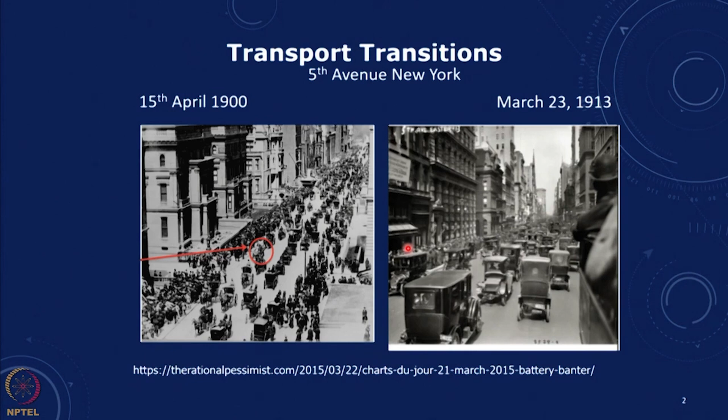The same street in Manhattan a little more than 10 years later, March 1913, and you can see over here most of them are Ford T's. These are the IC engine driven petrol cars, and on one corner you can see there is one horse driven cart. So you can see a rapid transition has happened over a period of a decade. There has been a shift in private transport from horse driven carts to IC engine driven petrol cars, and we now are looking at similar kinds of transitions where we are moving away from petrol and diesel based IC engines, maybe to electric vehicles, biofuel fired vehicles, or hydrogen fuel fired vehicles. So let's look at what the transitions were in the past.

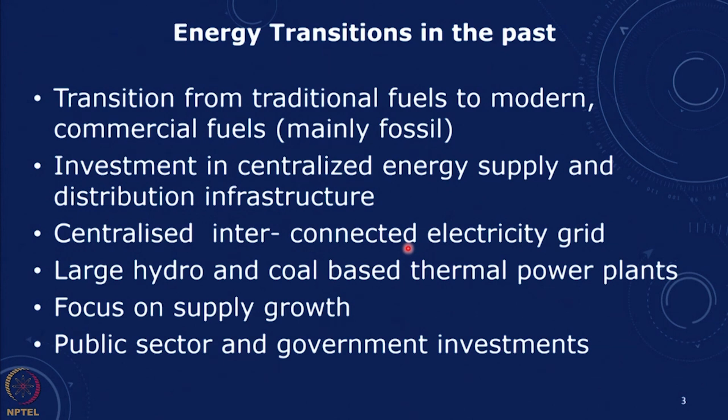So in India and many other countries of the world, we've made a transition from traditional fuels to modern commercial fuels, mainly fossil. We've also had significant investment in large centralized energy supply and distribution infrastructure and a centralized interconnected electricity grid, which is there now. It connects all parts of our country, and every single village is now connected to that grid. We have large hydro and coal-based thermal power plants, and the focus had always been on supply growth. Most of this growth happened through public sector and government investments.

What are now the drivers for the energy transitions going into the future? The first most important driver is the challenge of climate change, where we are trying to maintain the global temperature rise at less than 2 degrees or preferably less than 1.5 degrees. All countries have made commitments in Paris, and there is a global move away from fossil fuels. Today, 70–80% of the energy sources are fossil, and so the transition has to be away from fossil to renewables and maybe some amount of nuclear.

One of the biggest drivers has been significant drops in the prices of solar PV and wind. There's also been a reduction in prices of shale oil and natural gas, with the result that several countries which were oil importers have become oil exporters. In the Indian context, we've had success in public procurement of LEDs and fans, and there have been rapid declines in prices.

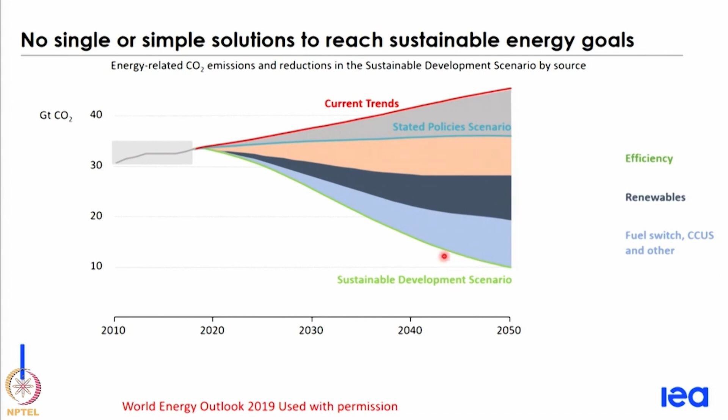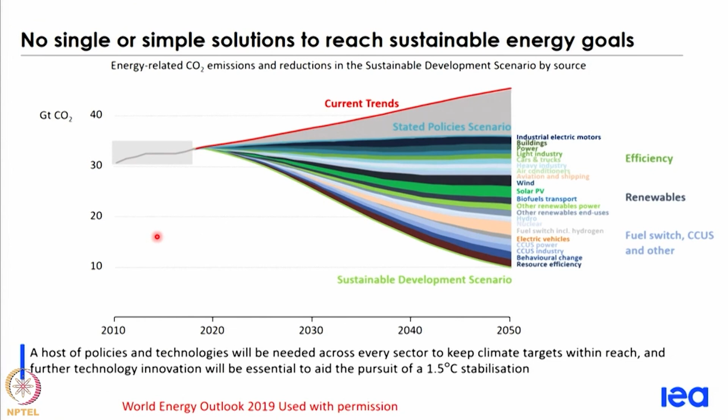This is now broken down into different subcomponents, and the IEA report gives details about how these could be achieved. So there are a host of different policies and technologies that can be adopted in every sector to keep the climate targets within reach and to look at a 1.5 degrees stabilization. This is a time frame till 2050 where these options can help us reach sustainable energy goals. And this is not going to be just renewables or just efficiency, it's a whole combination of different things.

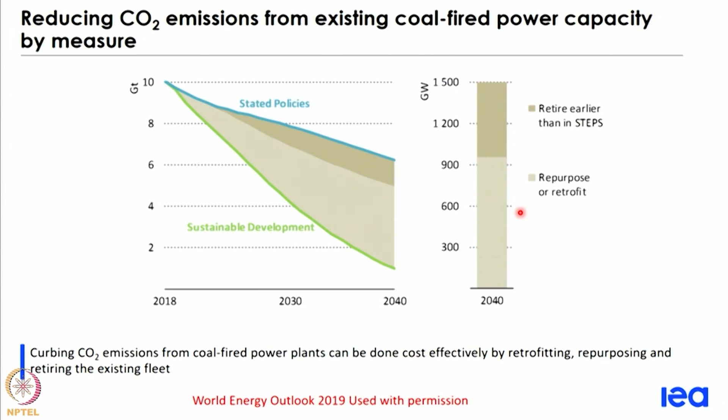The other issue is that today a large part of our energy comes from coal, and in India this is particularly true. We are trying to reduce CO2 emissions from the existing coal-fired capacity, and you can see that in the stated policy scenario this is the amount of reduction, and in the sustainable development scenario it would be even higher. Some of this would be where you would retire the existing plants earlier, and we can also rework the plants or retrofit them with CCS, or convert them into hybrids with renewables. So the coal sector will be in deep transition, and many of the existing plants would actually have to be phased out or modified.

Because we are having a higher share of renewables, there will be a need for flexibility in the system. Because we will have variable renewables in our supply, we should be able to quickly ramp up, ramp down, shut down certain plants and be able to adjust. And this flexibility would mean that we would need to invest in either demand side management or storage, and that might also add to the costs.

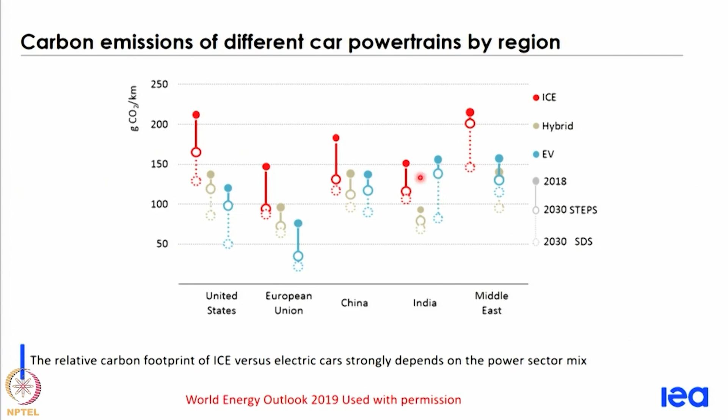And since the Indian electricity sector is predominantly based on coal, this results in this factor. In the future, of course, depending on how the mix changes, in the sustainable development scenario it would be much lower than this, but this transition comparison between IC engine and electric vehicle depends very significantly on the electricity mix, and this transition need not necessarily result in a reduction in the

CO2 emissions. So that's a point to be noted, that today if we look at this, it might actually result in a slight increase in the CO2 emissions. But with the grid becoming more renewable, in future that would not be an issue.

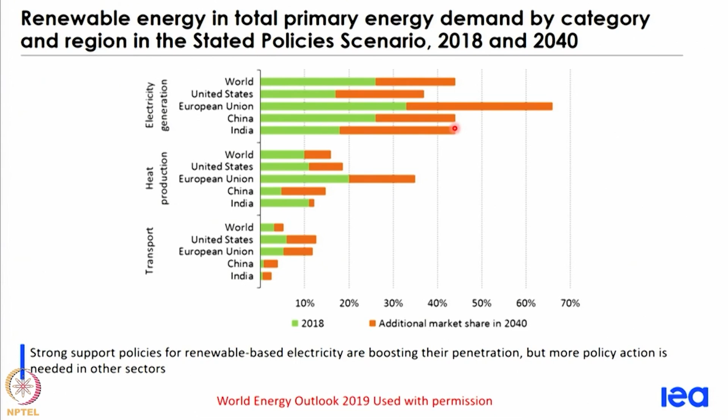In the stated policy scenario for different countries, you can see in 2018, in the total primary energy demand, we see that in India a little less than 20% is from renewables. This includes large hydro. In 2040, that could be more than 40% of the total. Of course, this is one particular scenario which has been developed by the IEA. There could be other scenarios. You can even think in terms of a 100% renewable scenario.

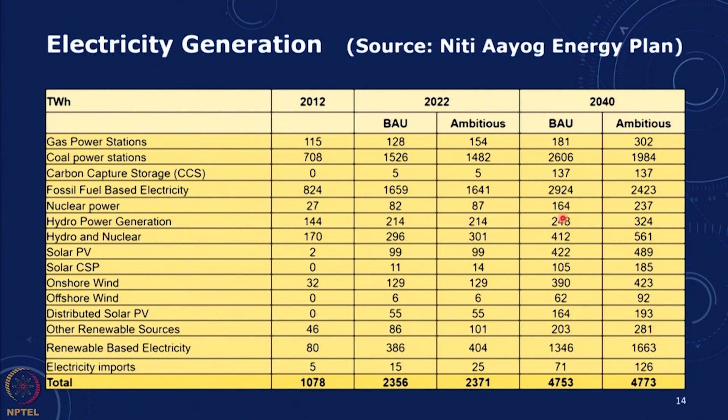Let me illustrate this issue of what happens when we have a high renewable penetration in the electricity sector. So we start with the projections from Niti Aayog as part of its energy plan. You can see that there is a projection for 2040, a business as usual scenario and an ambitious scenario with a significant amount of renewables. So we made a simple aggregate model where we looked at a base year, the year for which we have all the data, where we had the load profiles.

We also had data on the wind variability at different hours of the day in different seasons, and similarly solar insolation. We also had existing installed capacities by different categories: coal, hydro, solar, wind. Using this, we projected for a target year with some growth rate: the load profile, demand growth rates, solar and wind capacity growth rates, hydro and nuclear installed capacity growth rates, and variability in the demand. With all of this and the constraints, we obtained the future demand for different days by hours, daily, monthly and seasonal.

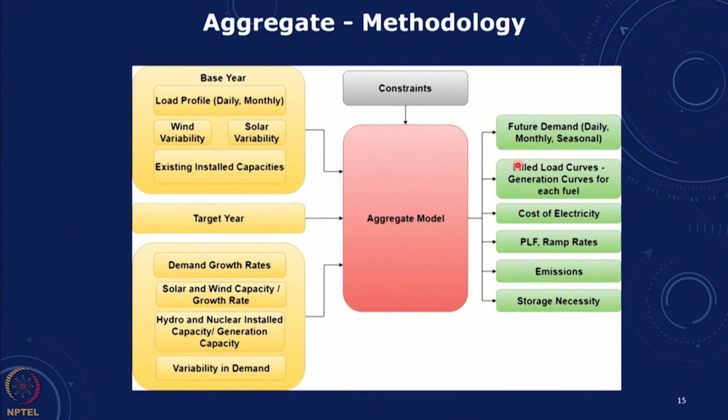And then we tried to allocate based on the capacity of thermal, hydro and renewables, to fill the load curve so that hydro met all the sudden requirements, all the ramping as far as possible. Whenever we need fast ramping up or down, hydro would be allocated for those parts. Then, after removing hydro, solar and wind, we found the residual load curve which has to be met by the thermal generators.

Then we saw what is the ramp rate, and whether it is possible for the thermal generators to meet those ramp rates. We then calculated the cost of electricity, the PLF, the ramp rates, emissions, and we also found out the necessity of storage. So we'll illustrate this: we projected from the existing curve the demand curve for the country as a whole in January 2040. This is for a typical day, and we have it hour by hour.

Based on this, then we looked at what hydro could do, and then we subtracted the PV and the wind, and then we got the residual. So these are the different filled-up load curves, and based on this we then got the requirement from the rest of the system, from the thermal generation, and we can look at the slope of this, and that gives us the ramp rate.

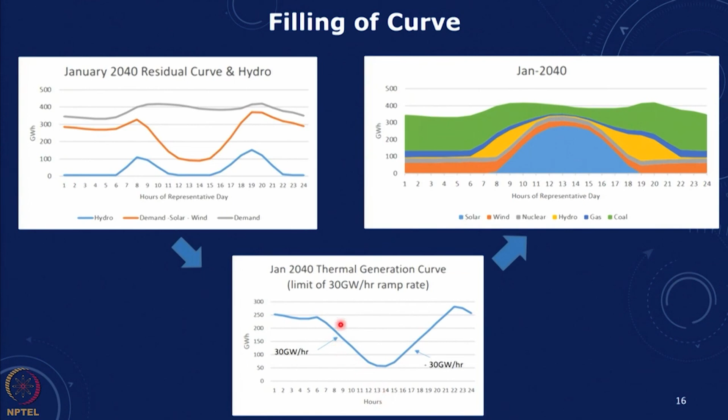And so that will give us the kind of ramp rates which we are getting, and this was of the order of 30 gigawatt per hour, and we can see what it means also on a plant-by-plant basis. If we increase the share of solar and wind, we get to a point where the electricity generated from solar and wind is more than the electricity required during that time period, and so then this becomes negative. This area under the curve, if we shade, that is the requirement for storage.

So as we go further and further, we can see how much every additional unit of solar and wind has to actually go through storage before it is used. So this is giving us the final renewable generation by different sources, and this kind of analysis can help us see that as we go for more than 35%, 40% by generation, then every megawatt hour of electricity additionally generated from PV has to go through storage and then be used at some other time period.

And so that will depend on the cost of storage, and even with pumped hydro it adds another 5 or 6 rupees per kilowatt hour, and that is one of the challenges when we think in terms of going for large scale 100% renewable scenarios. We will also need to look at variability on a short time frame. Suddenly if we had cloud cover in certain regions, the PV output may drop. We need other sources which can quickly ramp up and meet that requirement. And so the rules of the game for the electricity power sector will completely change, and there is a lot of scope for doing research and finding optimal solutions.

Another issue which we should think about when we talk about the transitions: when we started the solar mission, India was a net exporter of PV, but today more than 80% of our modules are imported, and most of it from China. Just to give you an idea, the module manufacturing capacity in 2016 was about 5,300 megawatts operational out of 6,800 megawatts installed. Actual production was only an average of 1,330 megawatts. So it's a very low capacity utilization because we are unable to compete with some of these large Chinese companies. 88% of our domestic supply is imported and 84% is from China, and this accounts for a very large import bill. Similar things are there at the cell level.

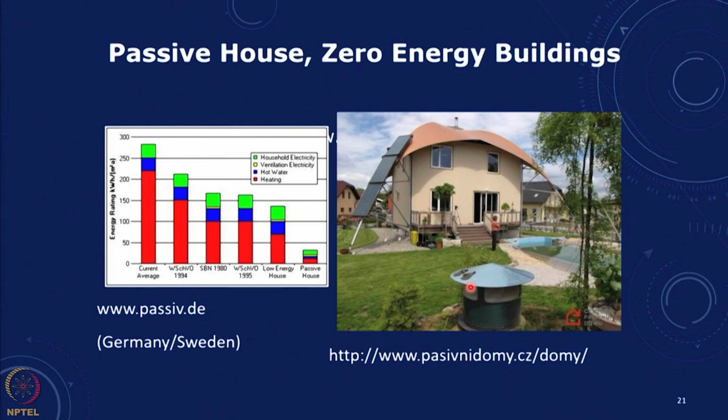Most of our renewable strategy has been with the large centralized mode. It is possible, of course, to think in terms of small decentralized energy. We can think of each house as a prosumer, where it generates its own energy and maybe supplies additional energy back to the grid. So we have this whole concept of passive houses, zero energy buildings and energy plus buildings, and if we do this, we can transform the way our energy sector looks, because we can have a large number of small houses which are prosumers, producing their own energy, also supplying to the grid, and the grid is there as a backup.

We had an interesting initiative from our students, where they participated in the solar decathlon. This is our student team, Team Shunya. It was the first Indian team in the solar decathlon finals. The challenge in the solar decathlon is to design, fabricate and implement a fully functional solar house running only on solar energy. This house is a 680 square foot house with 5 kilowatt of PV on top, some solar thermal, phase change materials, and it was designed and fabricated in the IIT campus.

It was dismantled, shipped and rebuilt in Versailles in France in June 2014, and this was during the competition. It was shipped back and it has been rebuilt on the IIT campus as a demo building. The focus here is first to design it so that the energy intensity is low, use passive concepts, reduce the total requirement for energy, then provide renewables on top. And these can be done in a way where they could be cost effective and we can reduce the operating